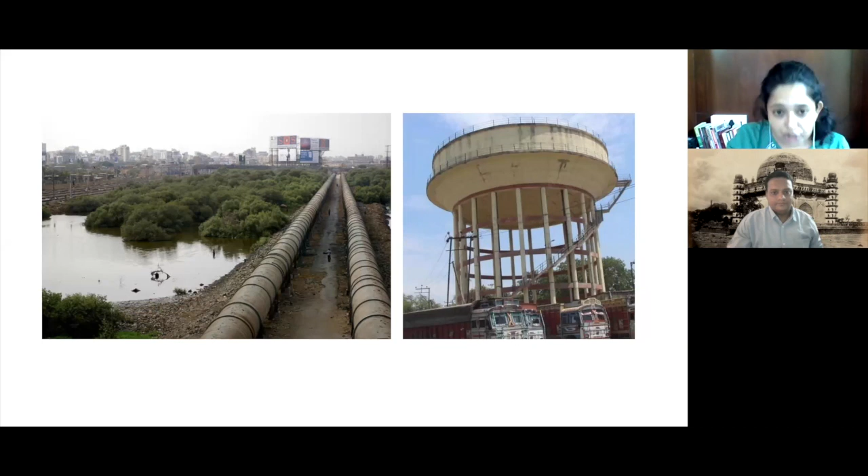I'd like to start with this image, something that we're all familiar with and see almost every day. There are huge water pipes that tap water from rivers or other big sources and convey it over long distances to inhabited parts. And on the right side, you see these huge water towers that literally dominate our skyline. What I want to introduce all of you to today is their 16th and 17th century, less monstrous looking Adilshahi counterparts.

What you see on the left is a pipe, just like the one we saw in the previous slide. And what you see on the right is a water tower that was in use extensively for Bijapur's water system in the 16th and 17th century. And it's not just about the pipes and water towers. There were a range of both collection and conveyance structures that worked together as a network to supply water.

Of course, these are 400, 500 years old. So centuries of disuse has led to the deterioration of many of these structures, but I think they are present enough. Even today, you can see remnants of it in Bijapur, enough to give us a clue as to how they must have functioned as a whole network.

Just a very brief history. So it was only with the Adilshahis, that's in the 16th century, mid-16th century to be exact, that Bijapur really came into prominence. Bijapur was made the capital city of the Adilshahi kingdom, and they ruled for almost 200 years from there, expanding the territories till 1686, when Aurangzeb conquered Bijapur and it came into the Mughal dominions.

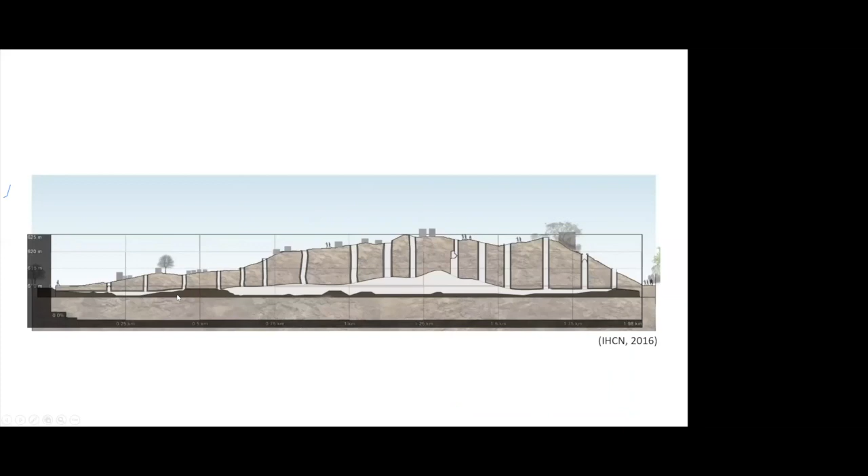Now, the technique is this: they would first dig a well at a valley or a place where the groundwater is very close to the surface, cutting across the aquifer. They would build a well, which is called the mother well, the source of all the water that's going to be conveyed later on. Now, from this mother well, they would dig a tunnel. Okay, I think I'll come back to this slide, let me go back to the previous one.

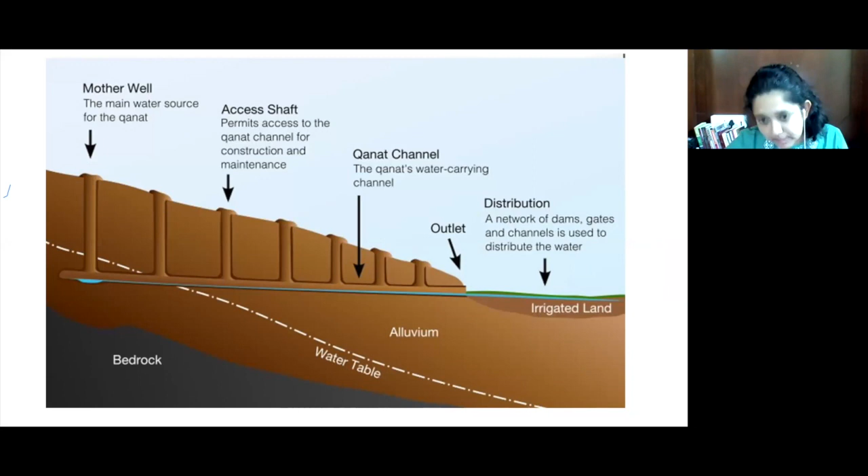So here you see a very gradual slope on the surface also. That's really not necessary. What is really necessary is that the tunnel is at a gradual slope, so that the mother well is slightly above the outlet, which is usually called the mouth of the karez or the surang. And if you see, it's very different. This is a section of Bijapur where, let me just annotate that, on the left, this region is really the mother well. This is a representative section because the Bijapur surang runs for at least 3 kilometers, and it has several vents or wells along its way.

And you see that the surface is not really sloping towards the outlet, but it's actually undulating, and it is at an elevation at the middle point. So if you're looking at the depth of these wells, at the beginning and at the end of the surang, it is usually about 20 feet or so. But in the middle sections, it actually goes up to 45 feet.

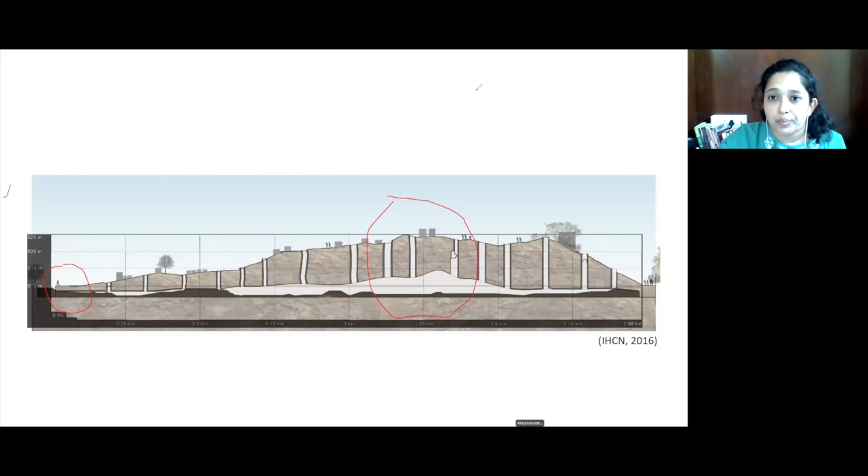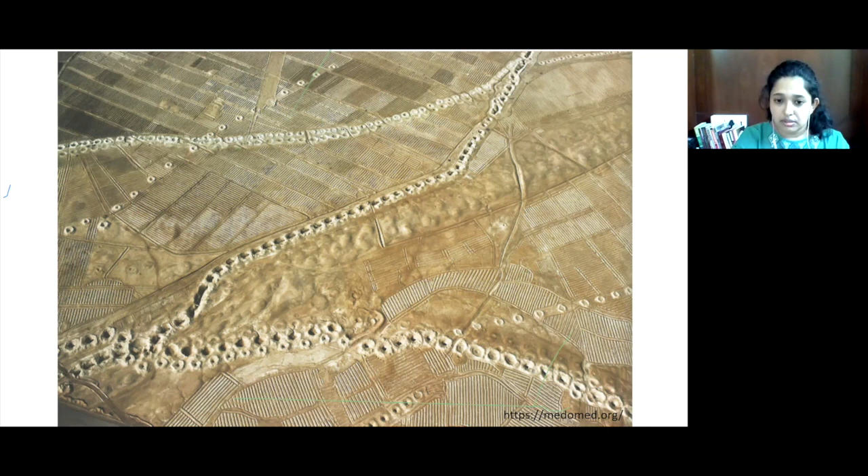After studying the differences and walking through short sections of the surang from the inside, I feel there were two different types of construction in use. The first stretch from the Surang Bauli, near the mother well, I don't think was tunneled under the ground, but rather a trough or deep channel was made, open on top, with a vaulted roof constructed over it and earth filled on top. Whereas in the midsection, it was actually tunneled under the ground, not a trough. So these are the differences in construction.

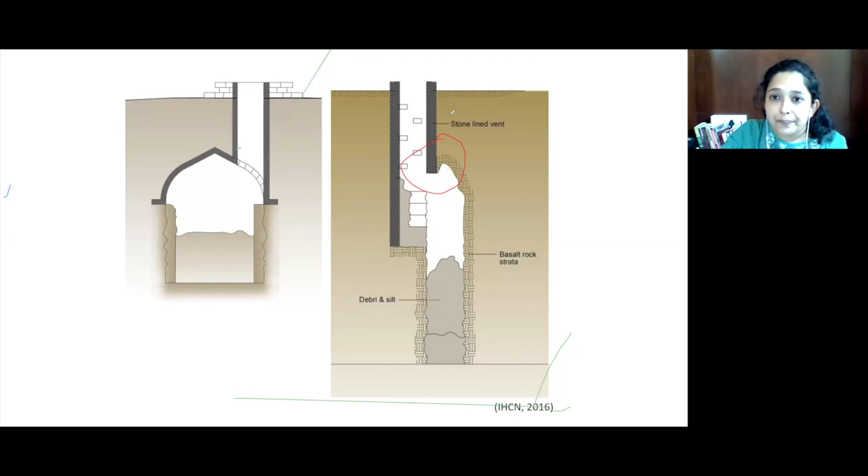Now, like I told you, this whole surang runs for 3 kilometers to the east of Bijapur, and along its course there were pipes connected to other water bodies for use by the public. Ultimately, all the overflow, the excess water, would flow into the moat of the citadel.

There is a problem of flash flooding in these surangs or karez, because if there's too much rain and too much water in the mother well, all of that and the infiltrated water would be conveyed in it. Since Bijapur, the fortified city, is located at a depression, there's a chance it can flood the whole city. Since they didn't want that, at several places along the surang underground there were sluices to regulate the amount of water going into the city.

Now there's an interesting thing happening. Along with the Surang Bawli, which carries water eastwards into the city of Bijapur, at some point, in order to augment its water supply, two other water sources were identified. One is a dam, like I showed in the first slide - an earthen dam which would impound water behind it on the south. From there, using sluices and conveyed through terracotta pipes, over a stretch of 1.5 to 2 kilometers, water would be conveyed into the area around the Surang Bawli again. We believe this was identified to augment the water supply of the Surang Bawli.

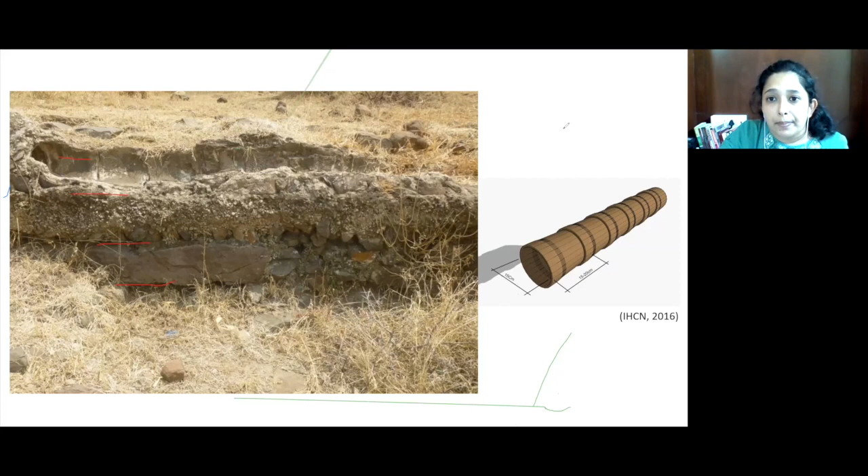So I said there were two sources that they had identified. One is on the south and one is on the southwest, near the village of Turvi, which Henry Cousens has labeled as the Turvi waterworks source, or Turvi reservoir.

So this is very interesting and intriguing for me, because why would they use two different techniques to convey water here? Why is it that the tunnel stopped? Because the slope is quite gradual, and why didn't they build - if the aim was to augment the water of Surang Bawli and the karez that goes into Bijapur - why didn't they construct a tunnel all the way into Surang Bawli?

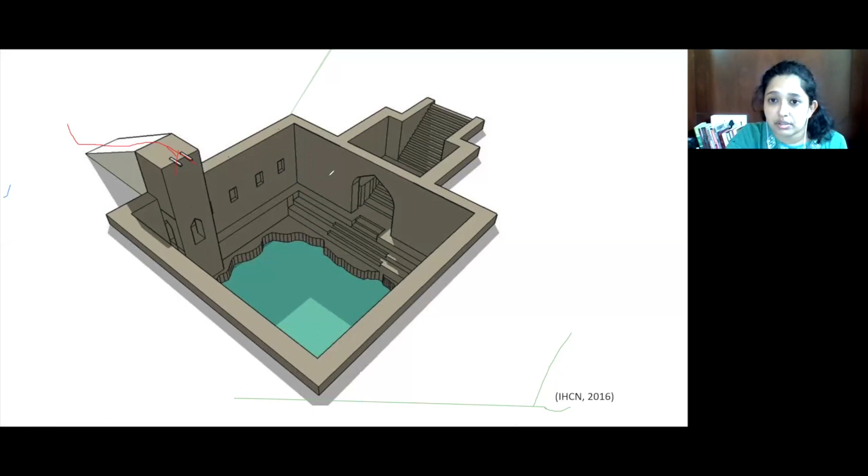And yeah, this is yet another view. Once the water is drawn, there would be a small sink kind of thing on top of this elevation, and the water would be collected in the sink. A channel would convey the water to a tank at the bottom level, from which, again through open channels, it would go into the agricultural fields. So that is how this whole system worked.

So I'd just like to end with the waterworks today and what is the status of it. During our survey, we noticed that it's mostly in the agricultural fields that the Baulis are really used. The story is really different with the Karez and the pipelines because of plowing and because of wear and tear and just exposure to the elements over 400 years. They've really deteriorated. The Karez is blocked, the surang is blocked in sections, and there is also sewerage and garbage waste being disposed into this gallery.

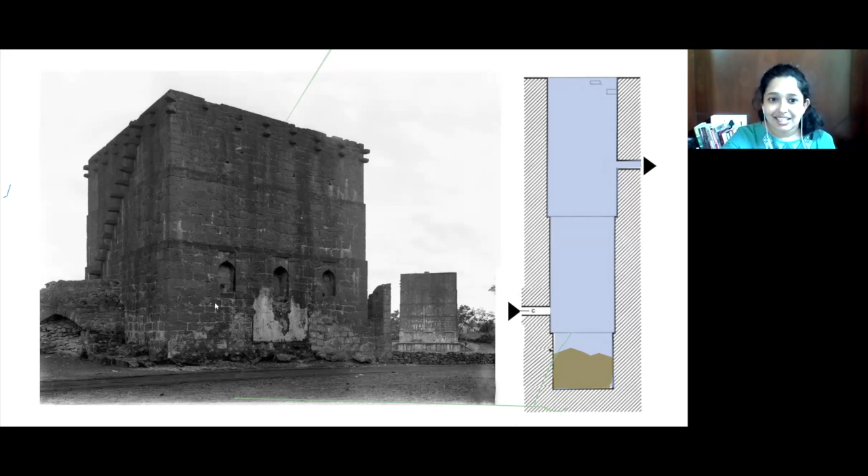Have you gone inside the Karez, and what is the condition? Yeah, the picture that I showed you is a photograph that I myself took of the Karez. That's this. So we can't really enter the Karez. There is a place where it's collapsed, near the Sainik School, just opposite in the district civil hospital campus. That's one place where you can enter, but not really go too long.

There are other spots inside the Sainik School campus, inside the inspection bungalow campus, and very close to the mother well, where the vents are open and people can actually go in and see. But it's really filthy inside, because like I said, sewerage has been diverted into the Karez in several places. So it's not really safe to walk around, but yes, you can go inside.

Anis is asking, does having a water system near the monument have anything to do with its longevity? But I think they're not really next to the monument. They themselves are monuments in some cases, right? But there are wells inside the monument for maintenance. Like Gol Gumbaz, we have a Bavdi inside. And also for the gardens, because there were several gardens located both inside the city walls and outside.

So I think these water bodies also supplied water to the gardens. Sharath is asking about what technological tools did you use for mapping these various structures? So we used GIS-based mobile survey. We used an app called Fulcrum. There are also other apps, data collection apps called Collector, which is linked to ArcGIS. So these are some tools that we've used, where we would go on site and get the GPS location of it. And I designed the forms beforehand and put it up on this app.